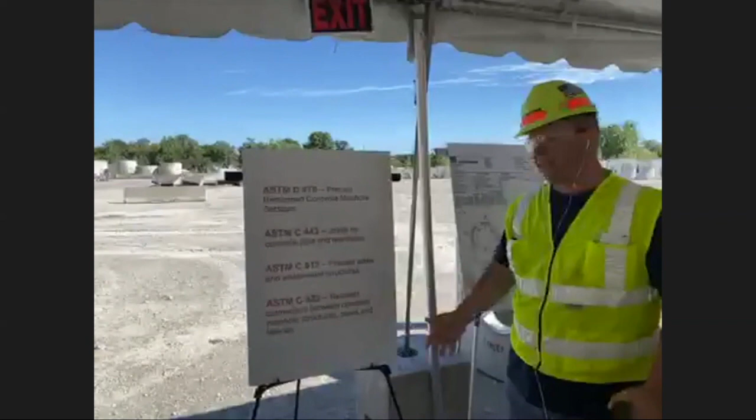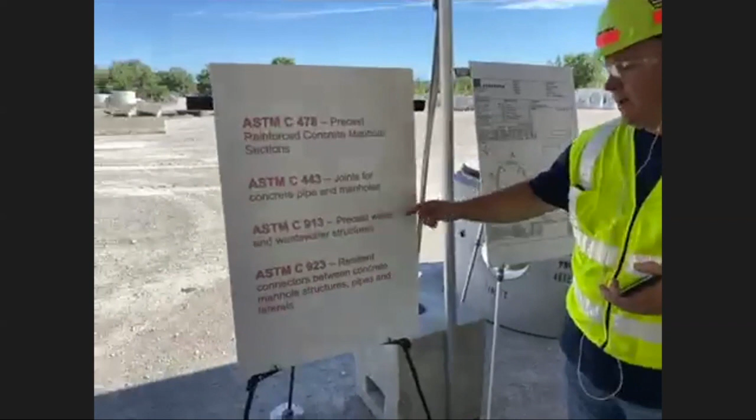In a precast factory, there's American Society for Testing and Materials standards, a bunch of different ones that we follow that govern everything we build. We made a quick list of the 4 biggest ones that we follow. The first one is C478, precast concrete manhole sections, which governs everything round that we make. 443 talks about the joints for concrete pipes and the joints for manhole sections, which we'll talk about later. 913 governs a lot of the rectangular stuff we build, which we'll talk about behind me. And finally, 923 talks about the connections between pipes and the structures they go into, resilient connectors.

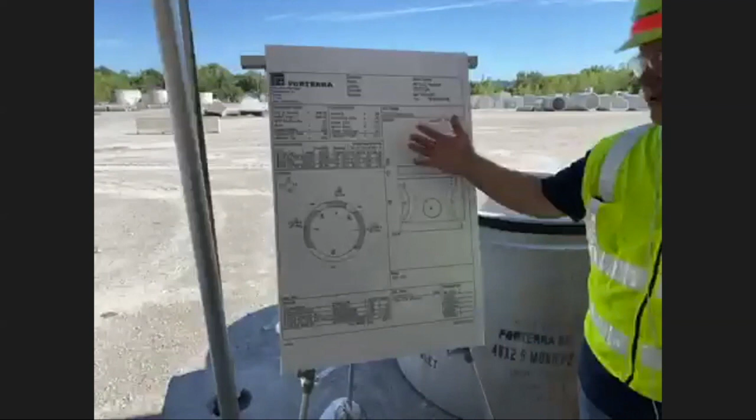The next thing I'm going to show you here is what we call a shop drawing. Precasters have engineering departments that develop drawings for everything, what we call MTO, made to order. Everything we build goes to a specific job, a specific customer, and has a specific purpose. This drawing here is an example of a round manhole. It's going to tell the plant that it's a 48-inch diameter manhole, how tall to build it, and also what openings to put in the structure for the pipes going in and out.

So if you look over here, this is an example of a finished product. The manufacturing plant is going to take this drawing and build this structure. For instance, this is a 48-inch round structure, and they're also going to put the different openings in it for the pipelines to go in and out into the storm sewer system.

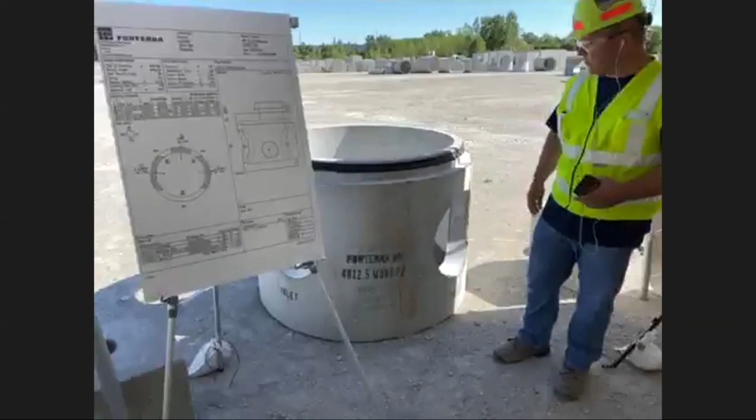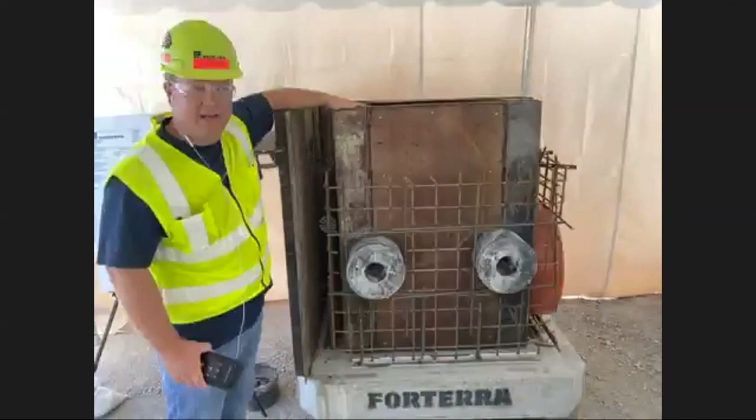Next, we have an example of an intake, this SW501, that's kind of in progress. The inside form is 2 foot by 3 foot, just like the drawing shows. We have an outside form that's 3 foot by 4 foot, which creates a 6-inch thick wall around the structure. You'll also see the reinforcing we use—everything we build has reinforcing in it. And then here are the blockouts, which form those holes you see on the drawings for the pipes to go in and out of the structure.

Next, we have almost like a mock-up of a finished product of this intake. So we put a grate on top. Many of you are familiar with these—you drive by them every day in the gutters of the street. What happens is the rainwater dumps down into the storm sewer system. Rainwater runoff we call storm sewer. It comes into here, inside our storm sewer structure, and from here the concrete pipe takes it to the storm sewer system.

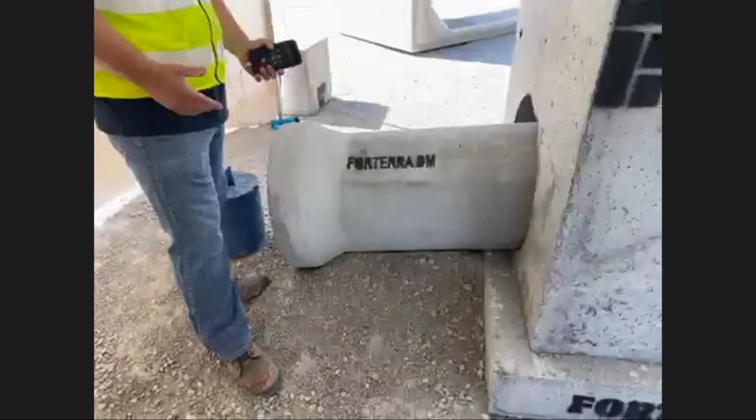We did a bit of a mock-up of what the contractor does after we ship the product to the job. They bed the concrete pipe in a rock bedding, then put the concrete pipe into the opening we formed in the structure. The final thing they do is a concrete collar to seal that connection, then continue to lay their concrete pipe out to carry the stormwater to its final destination.

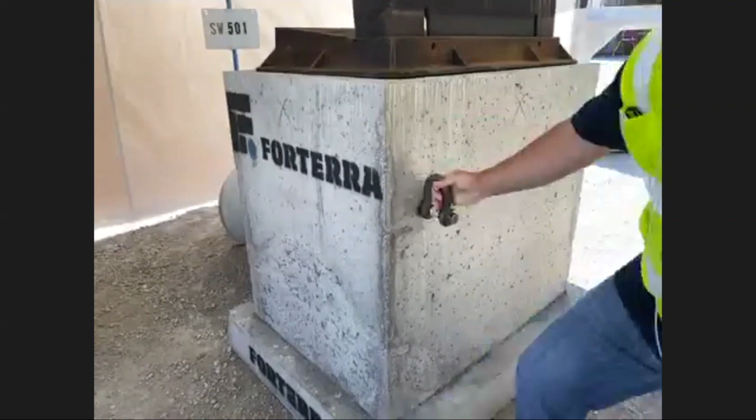One more thing I wanted to point out before we go across the tent is lifting. Everything we build in a precast factory has some method of lifting it—it's way too heavy for men to handle, so it has to be lifted by equipment. Here's a really good example, made by a company called A-Lock—this is a lifting key. In the factory, we cast in the receiving part of the key, and the contractors who install the products have these keys. They install the key, turn it to where it's in a safe lifting position, and it cannot come out, keeping them safe in the field.

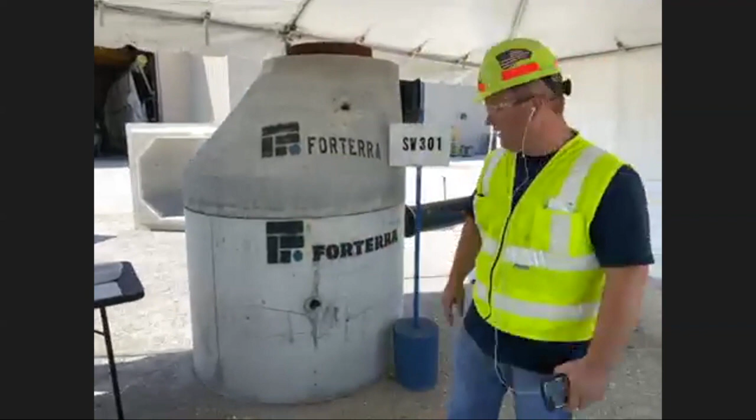So everything has a minimum of 2 lifting points in our factories. And if there's something that's not able to handle 2 lifting points, from the engineering side, we can figure out the center of gravity and create up to 4 lifting points if something's really heavy. Rectangular wise, I think the largest structure we've built here is 20 foot by 15 foot on the inside—just to give you a perspective of how important safe lifting is.

Next, I wanted to talk about sanitary sewer. Over there, I was talking about storm sewer, which is essentially rain runoff. Sanitary sewer is any type of sewer that needs to be treated before it goes back to where it came from—essentially, all this stuff is going to go to a wastewater treatment plant.

If you can see up top, it might be hard to see, but we put a manhole casting on top of this, a frame and grate. You drive over them every day, the round manhole castings out in the street. Below that is the sanitary sewer manhole. Here's an example of a cone section that tapers to a 24-inch diameter, and below that is the manhole section. These can be varying depths, from 3 feet to 50 feet deep, depending on how deep your sewer is.

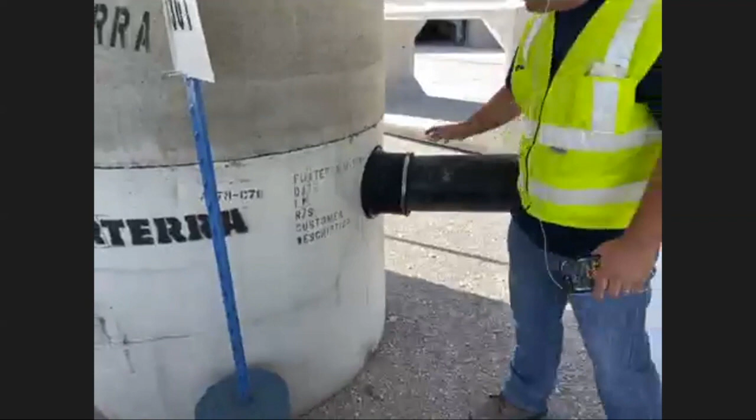Earlier I mentioned an ASTM standard that governed resilient connectors—it's ASTM C923. Here's an example of one. Your sanitary sewer is going to be carried in something like this, ductile iron sanitary pipe. But when it connects to the structure, it's going to have a booted connection like this. This is one of the 2 styles we use.

So this boot is expanded into the structure, but it's also going to be connected to the pipe with a hose clamp by the contractor. He's going to tighten that around the pipe to prevent any infiltration or exfiltration—so no groundwater can get into the manhole, and no sewer can get out of the manhole into the ground.

Finally, I wanted to talk about the joints and then the other resilient connector. Here's an example of a sanitary sewer base section. So the joints between the sections are also supposed to be tight.

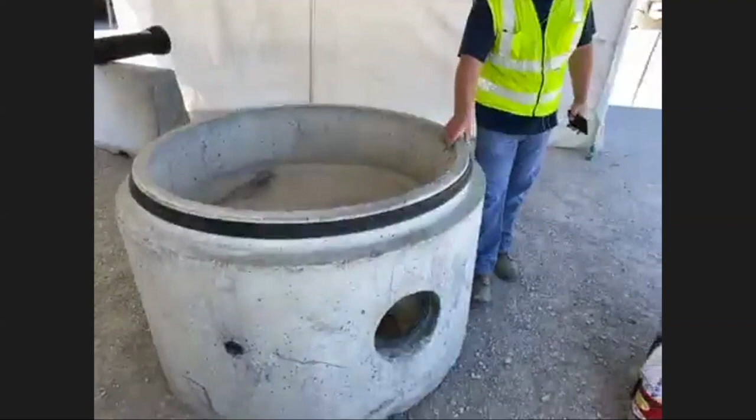They have what's called a rubber gasket on here, and this prevents any sanitary from getting out of the structure and also prevents any groundwater from infiltrating into the system. So when the contractor sets the next section on, this gasket is actually lubricated on the inside. It's going to roll over itself and then seal between the two sections.

And then finally down here, it might be hard to see because it's a small piece, but this is called an A-Lok, another product made by A-Lok companies. This is cast into the concrete. And when the contractor installs the sanitary pipe into this, the gasket actually squeezes the outside diameter of the pipe, again to prevent infiltration or exfiltration into the sanitary closed system.

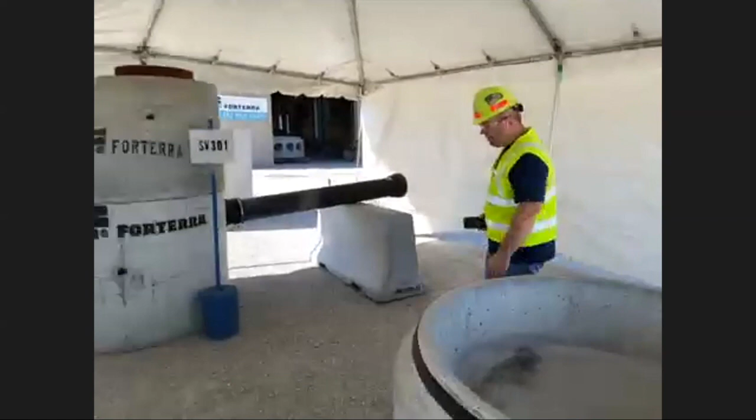Those beautiful concrete precast structures that Brandon touched on and showed you today are poured with two different types of concrete that we both pour here at the Des Moines plant. We have dry cast concrete and wet cast concrete. Dry cast concrete will be covered at another facility later in the tour, but today I want to touch a little bit on wet cast concrete.

Here at the Des Moines facility, our wet cast concrete is poured with self-consolidating concrete, or SCC. What you're seeing right here is the basic components of that SCC. So we have cement, type 1-2 cement that comes from Lafarge, produced out of Missouri, into our Des Moines terminal. We have fly ash, which we do a 30% replacement on, that comes from National Minerals Corporation, also into our Des Moines terminal.

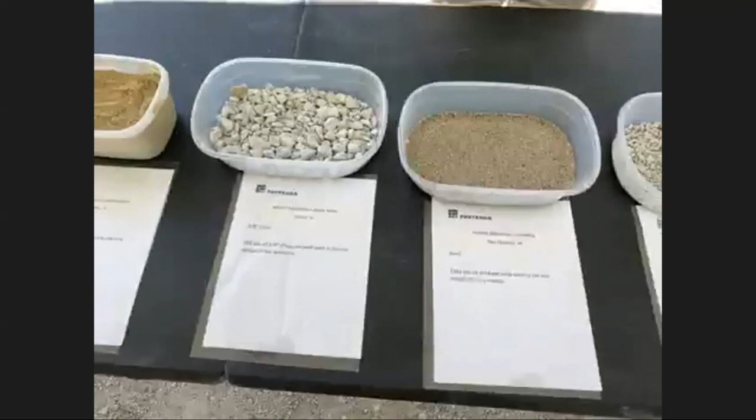And then we use a three aggregate system. So we have a 3/4 chip, a concrete sand, and a 3/8 chip. All three of those aggregates come locally. We are very lucky in Iowa to have great aggregate sources, and they're all within a 30-minute drive of us.

Along with those basic components of our SCC, we use additives such as high-range water reducers and viscosity modifiers to help suspend that aggregate into a very flowable spread mix. SCC is much like the concrete you see on driveways, roadways, sidewalks. When we put those additives in there, the water reducers and viscosity modifiers, we make that concrete very flowable into a 27-inch spread versus the slump you see out on job sites. So that concrete is working for us instead of our guys working at the concrete.

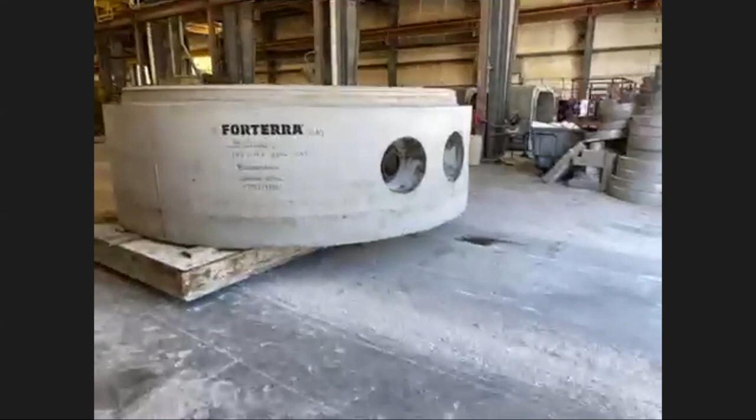As we walk into the production facility, we're going to look at some panel intakes first. As we pass by, we have a 144-inch manhole. If this doesn't work out for the contractor, we've got a nice swimming pool for the guys—a 4-foot wading pool. I think we want it to work out for them, though.

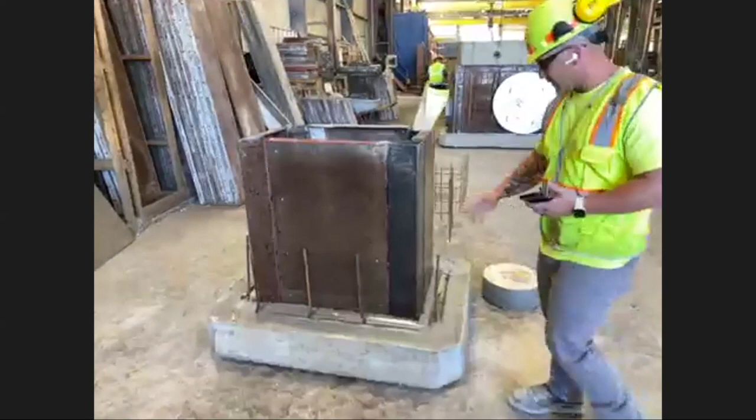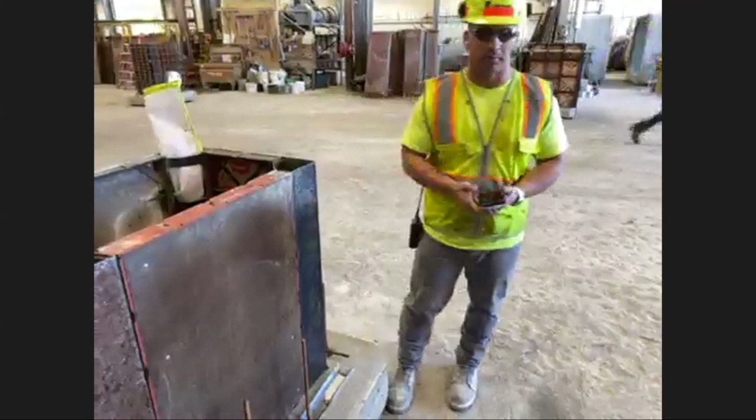The first one we come up on is sort of basic—this is a setup of a 3x2, or an SW 501, that Brandon pointed out. We have our floor section that we poured yesterday, and we've got our 3x2 set up. These forms are called Symons forms; in the construction industry they're also known as basement forms. They can essentially make just about any size we want, ranging anywhere from a 2x2 inside dimension all the way up to that 20-foot by 15-foot that Brandon talked about earlier. You can see the guys have their production drawing right here, just like we showed on the easel out there. This thing has its core up and we're ready to put steel on.

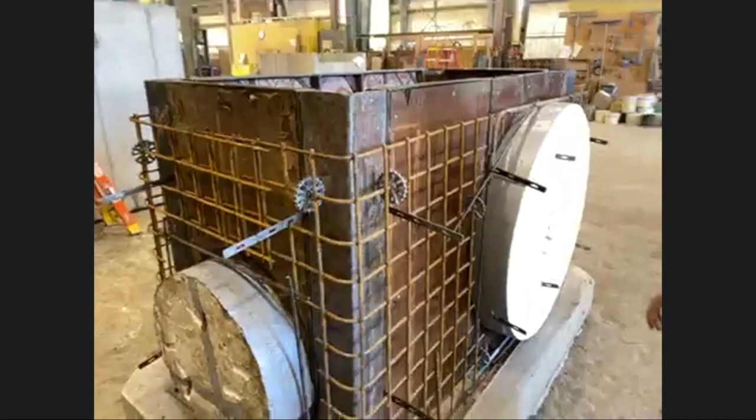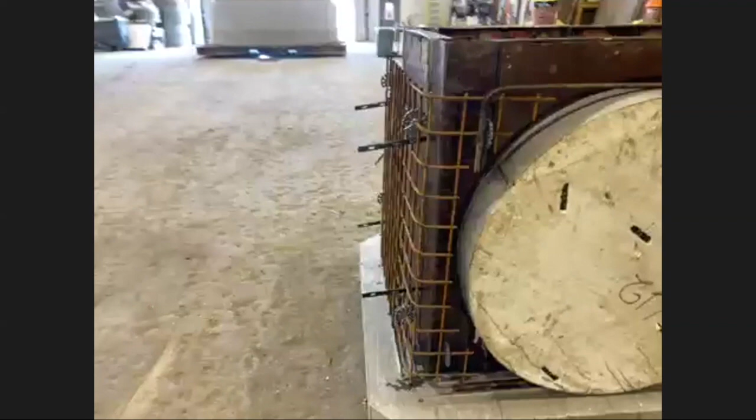As we move forward, just like the one we saw out there, we've got a piece that's ready to be QC'd. We've got our 42-inch hole for our RCP opening, with extra bar around that opening where we had to cut the steel out. We mainly use welded wire mesh at this facility, and we're lucky enough to do that in the state of Iowa. We have 4x4 mesh on this one, D10 and a half by D10 and a half, and we also have that equivalency due to our SUDAS standards. You can see we have spacers on there, and our 6-inch wall ties to make that 6-inch space as we put our jackets around. Next, this would go to our QC or management to sign off, go through our ACPA certified checkoff process, and then give the guys the go ahead to throw that jacket on. So that was a 6x3 structure we just saw.

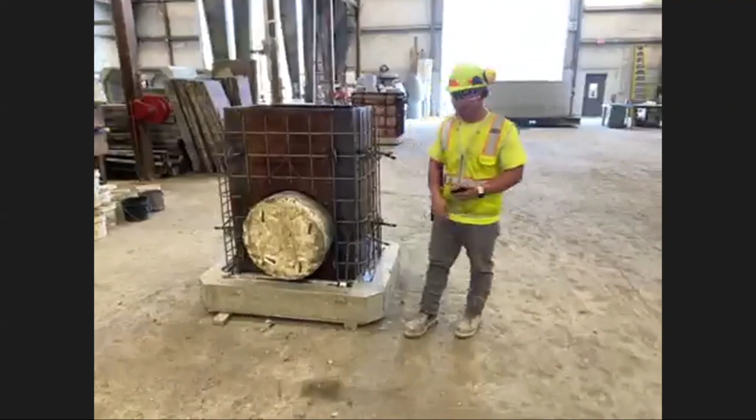We're going to move over to another 3x2—just like the core setup we saw, we'll see the same thing here. This one required a little bit different steel, an area 20 instead of an area 31, so you can see we have 6x6 spacing here, with D10 by D10 wire. We have that opening for a 15-inch RCP going there. Again, we have our spacers, and we have our 18-inch opening—I believe that's for a 12-inch RCP on that one.

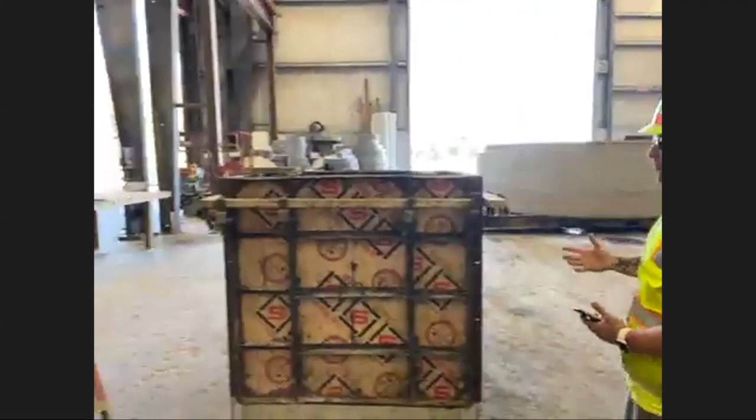That one is ready to be quality control checked and signed off on, so they can put those jackets on. The last one you'll see here is a finished, ready-to-pour product. They have their walers on the outside, which helps keep that wall straight. Sometimes if we have a large block out, we'll nail that to the base.

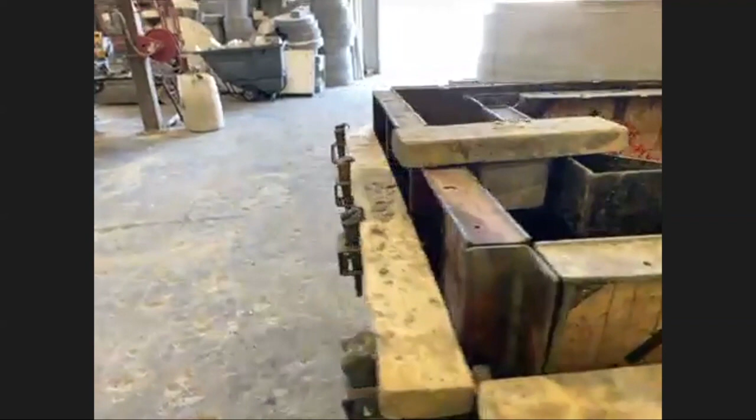Up top, you can see that this panel is not going to be poured all the way to the top of the form, so we have a drag board set up to be able to pour that height. This particular piece has been signed off on by QC, and the signed-off sheet is in the folder showing it's ready to pour. Then our pour team can come through and do their job.

I think that's it for my part of the tour. I'll throw it back over to Brent.

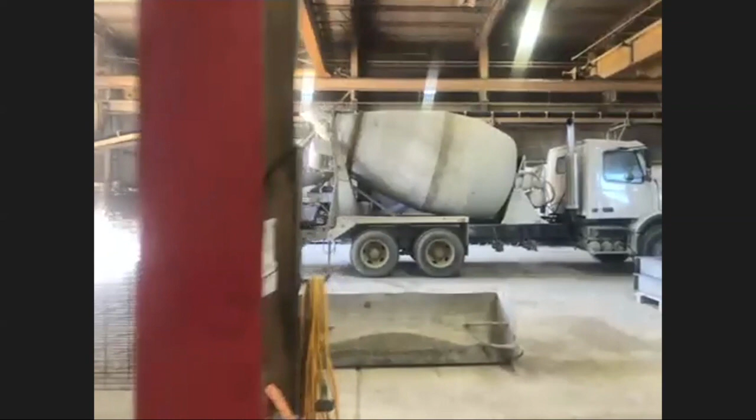We're going to move right into our production line here, and I'll have John Christensen take over and describe what you're seeing on the video feed. Morning. This is our mixer truck, this is how we pour. We have an in-house batch plant, and we pour with that along with that 2-yard bucket, which is a remote control bucket provided by New Hampton Metal Fab out of Iowa. It's run there by our overhead cranes. Everything we do in this plant is with overhead cranes.

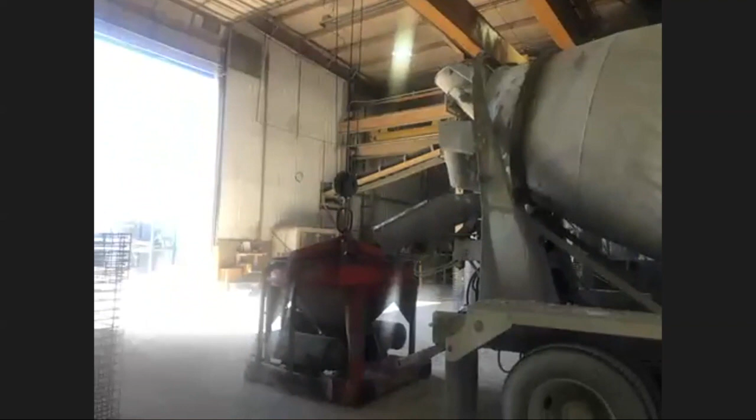The cage to your left is a standard 10x6 Class 2 cage. You're looking at a piece of duct tape there with all the dimensions written on it by QC to make sure it meets all specifications. Also on this cage, you're going to see the spacers that hold the spacing 5 inches on the interior with bolsters, and on the exterior we've got either the round wheels, 1 3/4, or the poly snaps provided by Strike Tool.

Question, John, or maybe for Yes, Jake or Matthew: how do we know how much steel to put into our cages? You want to take that, Jake? You might be on mute, Jake.

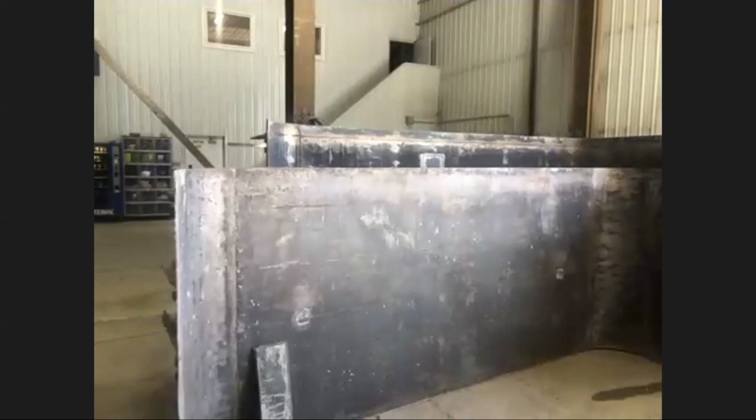We know how much steel to put in our cages based on the design. MnDOT has standard designs for that, so we follow those standard specifications. That's how we know. Or if it's a special design, our in-house engineers will design that.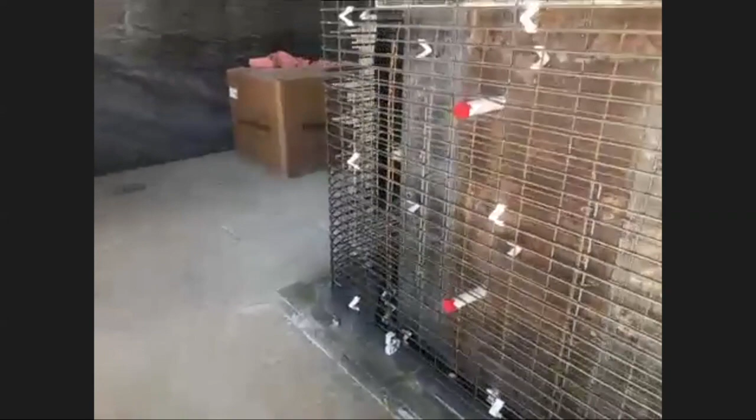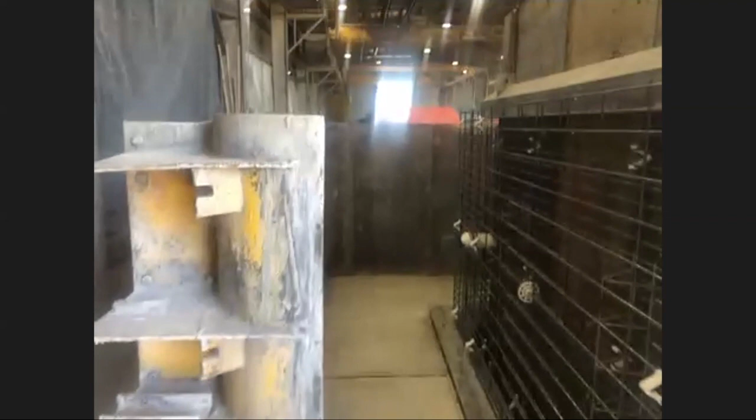Now as you're walking across, you're going to see another 10x6 core set up here. This is the point where QC is going to double check it again. Even after that, they're going to check it again to make sure the tie pin holes are in it, make sure there's enough poly snaps on it, make sure all the spacers are correct, make sure the wall thicknesses are correct. That is one of the PVC for the tie pins. As we pan around to the back, we do use PVC for our lay holes here. That helps assist in laying it, but also as we tip it off the form here.

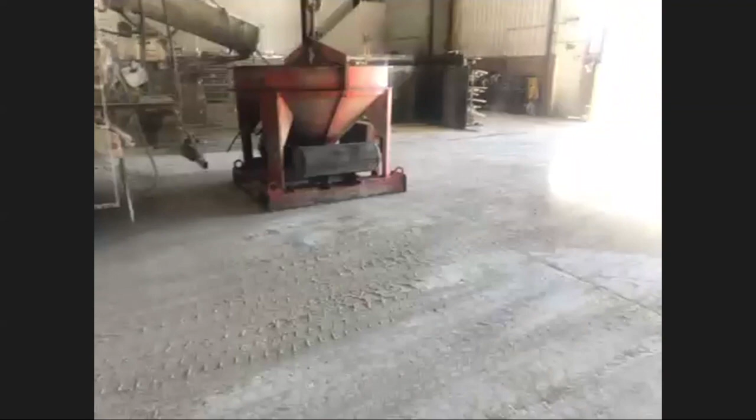As we walk around, this piece of pipe right here will weigh in excess of 20,000 pounds. This is just a jacket waiting to be sat on the form. As soon as it passes QC, they'll let them know to put it around there and pour it.

We're going to walk outside the plant here over to our quality control area, again using the man doors for safety purposes. Entering door 17.

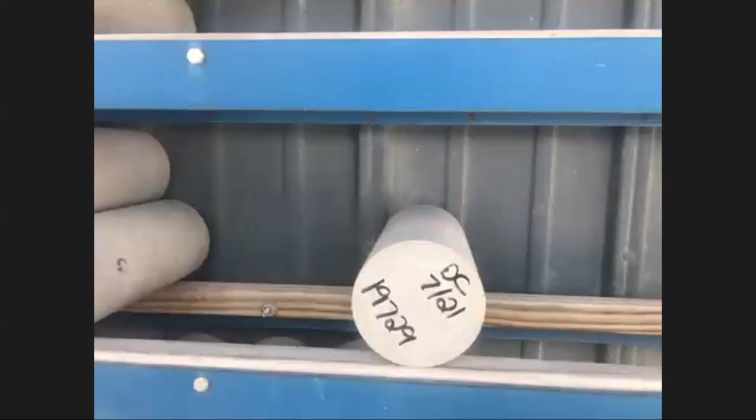I'll ask Matthew to jump in here regarding quality and how we assure the strength of our concrete. So the first thing you're going to see as we walk up here is what we call a cylinder rack. Basically what those cylinders represent is a sample of the batch that is used to create the products. Usually a batch represents about 25 yards of concrete. That one you're looking at there is a dry cast cylinder formed on 7/21 out of batch number 19729.

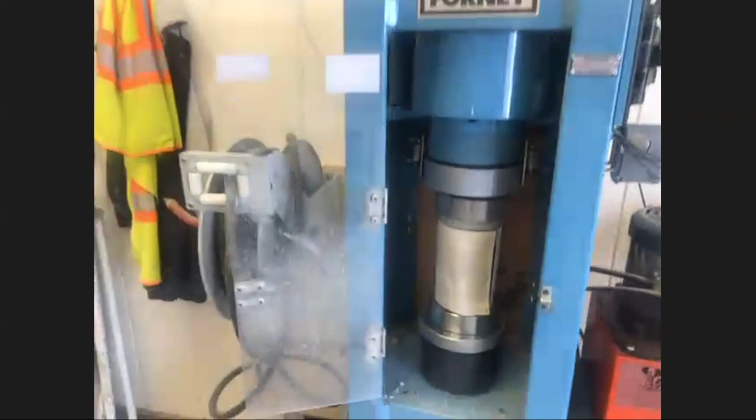Basically what these cylinders do, depending on the class of the structure that is poured, is represent the strength of those products through day 1 through day 28. So for example, tomorrow they're going to break cylinders that were cast today. They're going to put them in the machine you're looking at right in front of you, the big blue machine there, and that is going to create a load on that concrete cylinder until it breaks. Once that's broken, it's going to record the PSI that was used to break that cylinder. Then, depending on the class of that concrete, it's going to verify that it can withstand the amount of strength required to be used in the field.

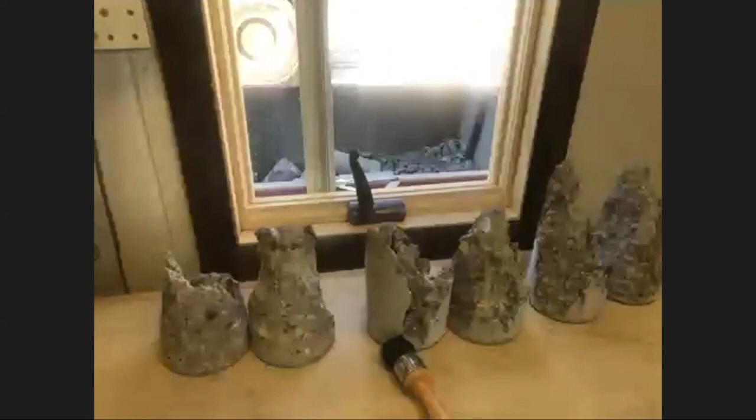So we'll break them on day 1, and the last one we'll break is on day 28, and intermittently throughout there, to verify that the concrete has the recommended strength to go out into the field. No concrete structure will be sent out until the strength has been met.

Matthew, could you briefly explain how we interact with our DOT here? Absolutely. So we have a Minnesota DOT inspector on site at all of our plants 24/7 when the plant is in operation. The reason for that is a lot of our DOT jobs are inspected by our quality team, and they're also inspected by the Minnesota DOT inspector to ensure that the structures made for those jobs are adequate to perform. Then the Minnesota DOT inspector will actually put their stamp of approval on the concrete structures that go out in the field.

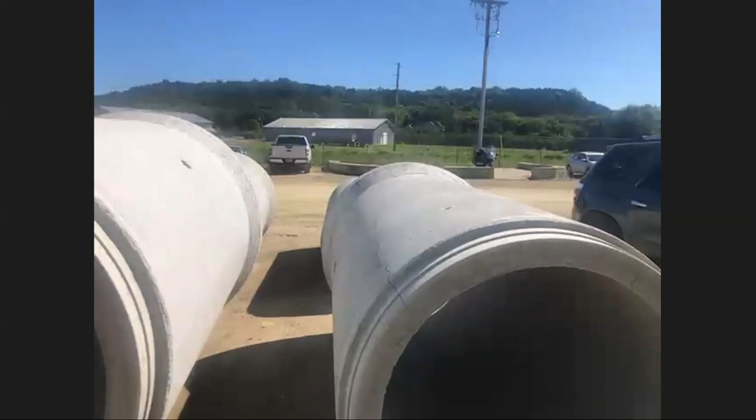Great, thank you. John, you want to describe what's going on here with these pieces? Well, these pieces here have been put through our 3-edge bearing tester. We put an ultimate D-load on these, and after that happens, these pipe are put out here to be cored, to verify the core strength and the steel placement. So that's what these pipe are here. These are waiting to be cored.

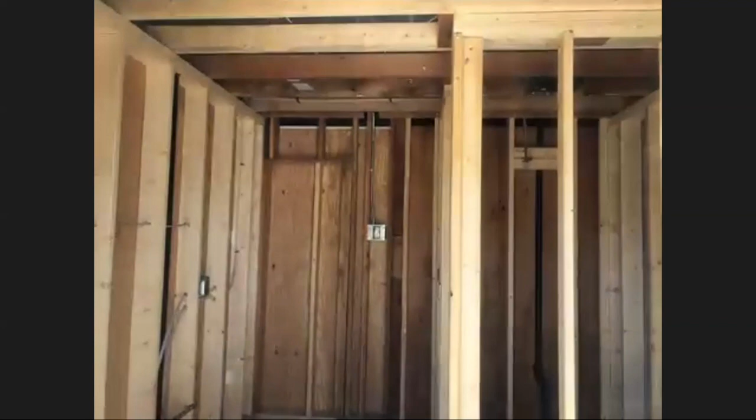Thank you. Let's highlight something that's a little bit different about our plant here in Cannon Falls. You want to describe what I'm walking into right now, John? This building is currently under construction. This is a project Hancock is really excited about, because with COVID-19 and our truckers - we recognize they're one of our biggest assets - and with Morel Transfer out of Elk River and Lefebvre Transportation out of Elk River, and the truck stops essentially, a lot of them shutting down to the truckers, they have no place to go. And they're typically on the road about 5-6 days a week.

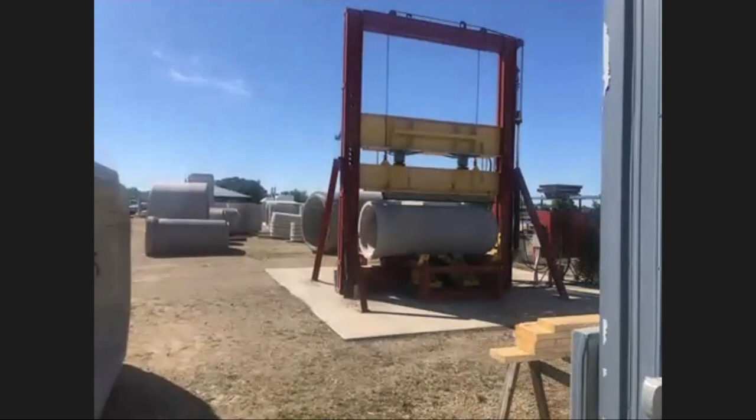So this is our shower house. It's got a nice big shower in it, a 4x6 shower, and a laundry room. This is going to be a place for them to go. There'll be an awning out front, a grill, a slab, and whatnot. So it's kind of a home away from home for them where they can go. That's great for us too.

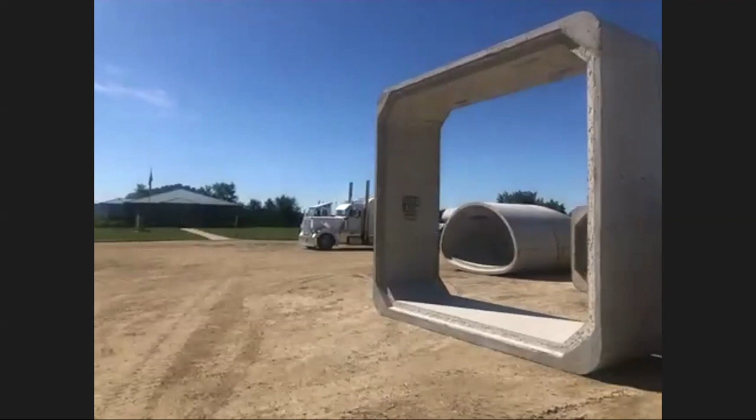The wet cast is your traditional concrete, what you pour your sidewalks and stuff like that out of. Dry cast is a lot drier. It has less of a water to cement ratio, can get down into that 0.23 and whatnot. So it's a huge difference, one's dry, one's wet. In the next part of the tour with Riley from Forterra, he's going to have an example of what dry cast looks like and what that entails.

Another good question while you're on wet cast and dry cast that helps follow up is, how do you cure the concrete and how long does it take, wet versus dry? Curing time is relatively about the same. Dry cast, typically about 18 hours, we meet our design strength. Those are typically right after they're poured, they're all covered up. Same as our wet cast, they're covered up, a 3-hour wait time, and then we go ahead and apply steam at a certain rate to them.

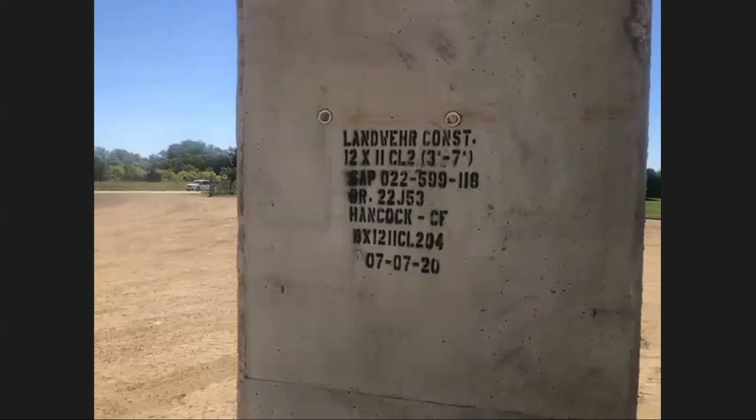And what is that compressive strength of concrete? Depending on, a standard dry cast pipe requires 4,000 PSI, and you can get like class 5 with 6,000 PSI. Your box culverts here have a standard of 5,000 PSI, but when you get up into some of your higher classes and higher fills, they will be 6,000 PSI.

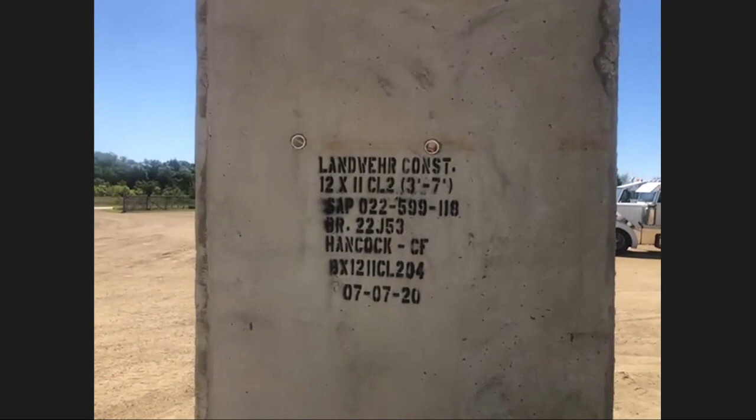Great questions, thank you. So John, what am I standing in right now? Here you're standing in a 12 by 11 box culvert produced for Landwehr Construction. It's not the biggest box culvert that Hancock's makes. The biggest one produced at our Hancock facility was a 16 by 12 double cell back in 2016, but we do make them up to 24-foot span and 17-foot rise.

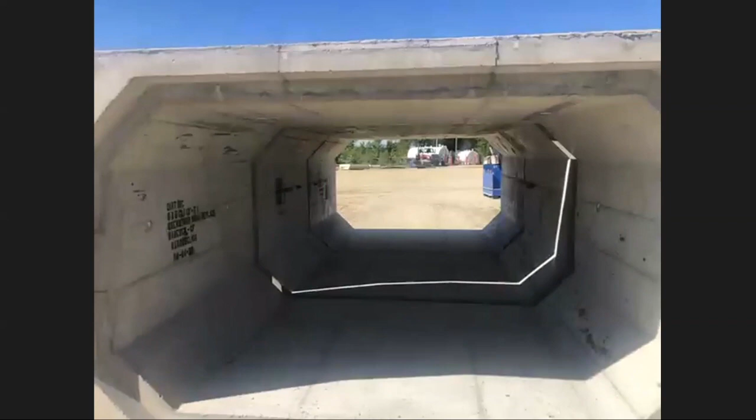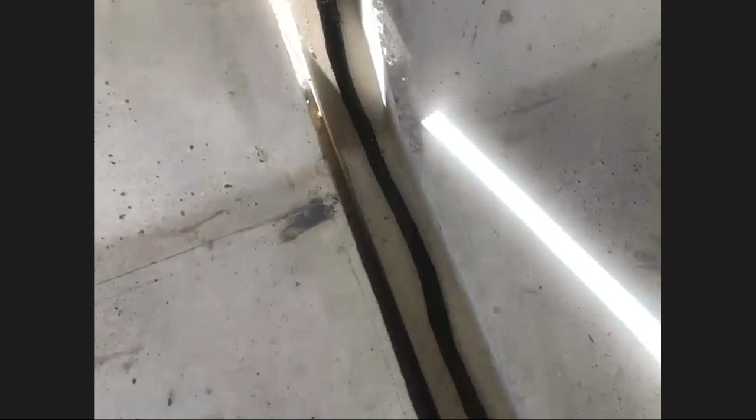This is a 9 by 5 that we just put together here to kind of illustrate how this is out in the field, what the contractor is looking at as far as the mastic, where the mastic is placed. As you see here, the mastic is placed in the center of the joint, and it goes into the haunch, dead center of the joint, into the haunch. And this is on the flow line, but MnDOT requires mastic all the way around on their joint. So as we go to the outside, we'll see how we place that also.

And then of course, the next one is the tie rods in there, and then the joint actually together. So you can either have your tie rods, depends on what the municipality wants, whether it's inside out or outside in.

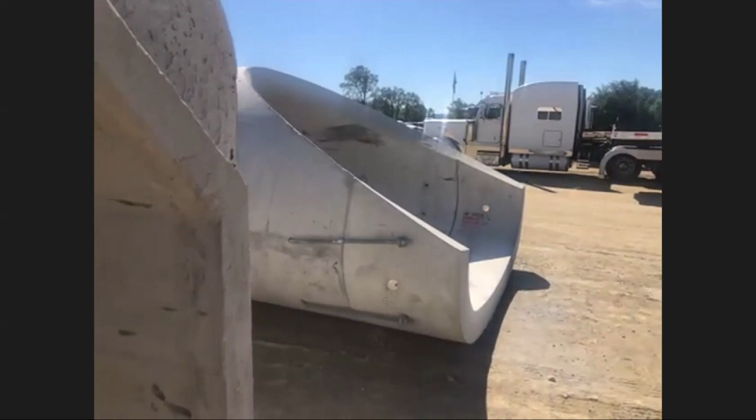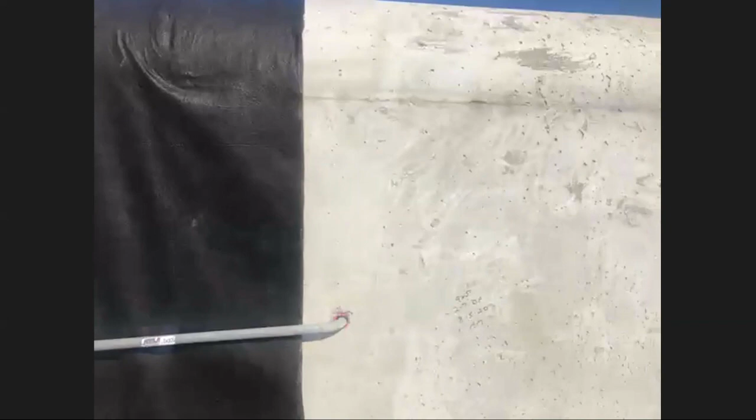We had a quick question based off a vocabulary word. What is mastic? Mastic is the joint sealant. It's a butyl mastic. This particular one is 1 inch by 1 inch that is put into the joint. It's a sealer, you'll see it, we call it mastic. This particular one is the filter cloth that goes over the top of the product. The contractor would apply an adhesive and stick this right there prior to backfilling to ensure that that filter cloth stays there. That ensures that there's no infiltration of dirt and sediment.

So here's the other part of the mastic, John. Obviously it got a little hot, and it looks like it dripped off. Yes, it fell off. That would come all the way down. That's that butyl mastic, inch by inch, that is set in the joint.

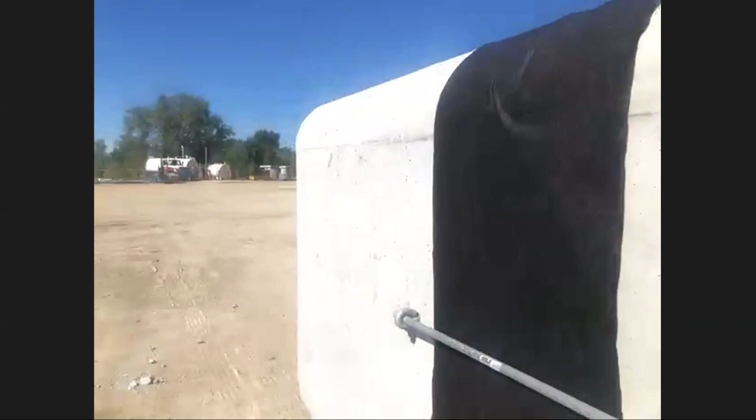I think our time's coming to an end here, but let's briefly show our 115-inch arch pipe here. This is standard arch pipe that we produce. We produce all the way up to 169 inch. This is 115, shows you a number 2, a number 1, and a 6-foot barrel section.

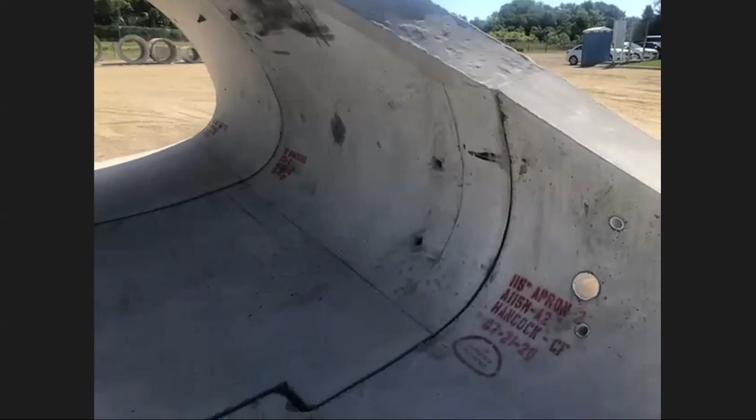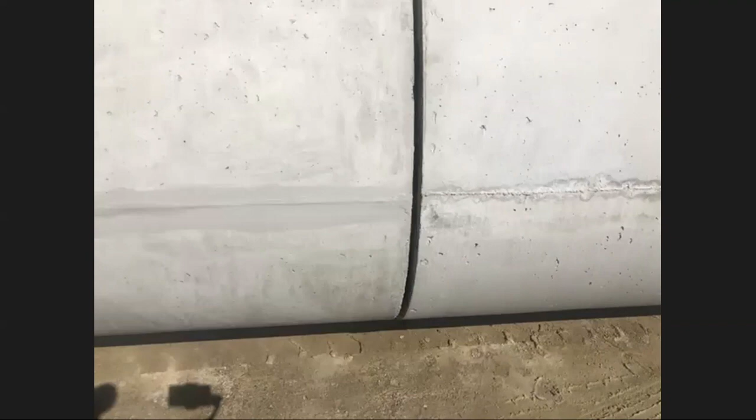Hey Jim, I have one more question for you before you jump over. What are, just with regards to the outside, is there any finishing that's done to the surface, either to make it look a little bit neater, smoother, or anything like that? Or does it just kind of go in as is? No. The surfaces are mudded. Like this one here has not been prepared yet. They get mudded and all joints are sealed up. And then of course, anything bigger than, let's call it the size of a dime, bug holes are filled.

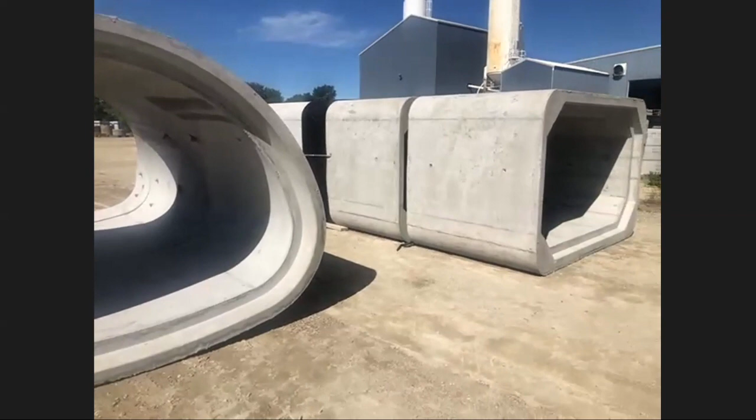This one we just pulled right off production, and brought it over here and marked it. We do have a continuous patching crew that will work, probably 1 or 2 of them at each of our plants. Another great question that came in is how that goes to the finishing look, how is concrete consolidated in our plants?

In the wet cast, it's consolidated with high frequency vibrators that hang on the form, that's how those are consolidated. Over on dry cast, they're internal low frequency vibrators that force it down.

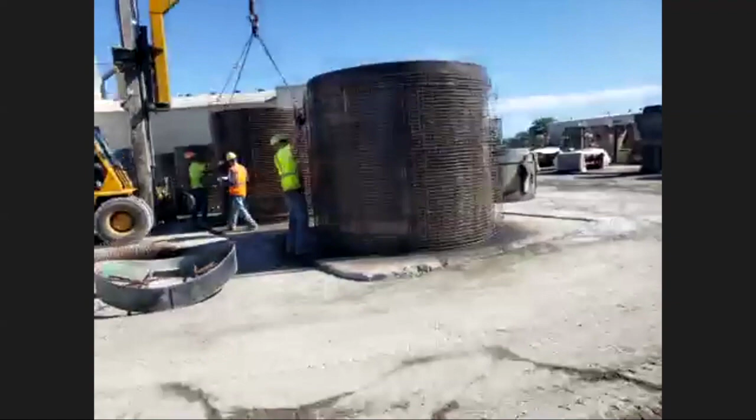So as Brian said, we do make a lot in this facility. We make pipe, bridges. Hey guys, how's it going? We make box culverts and a ton of specialty stuff, but what we're going to be looking at today is just pipe. Oh, hey, this is why you use doors and not the overhead, right? Hey, Jake. Hey. All right, so we're going to be moving through. We make a lot of very heavy stuff, so you'll see a lot of really big equipment here. We make all of our large diameter structures here, so you can see our manhole setup right in front of me here. I am making my way over to the dry cast pipe building.

That is a big building that we see in front of us here. Up to the left, that is our batch plant, where we mix all of our concrete. That's really where the process starts. We've got silos with all of our aggregates, sand, and cement, and that's what we mix into our pipe right away.

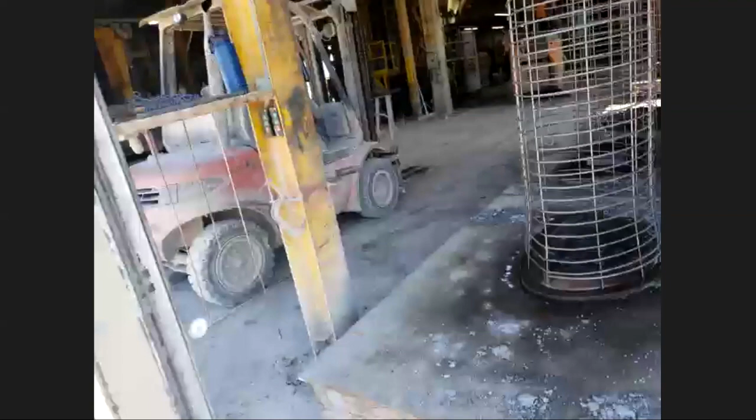So the first step of the process, the first thing I really want to show you guys, is when it comes to pipe production, it really starts with a cage. That's what we've got in front of us here. This is an arch cage, a 29 span arch. A lot of what we do here in Elk River is with 2 cages, but this happens to be a single cage product.

So there's a few things that we're concerned about when it comes to our cage. Number one, the diameter. You guys saw over at Hancock, they had measurements written on their cage, and those are very important. Those are measured with micrometers, just to make sure that the diameter of the wire we're using is sufficient and as per design.

We also want to keep an eye on the spacing between the wires. Obviously, if wires are spaced closer together, that gives you higher strength. And the last thing we're worried about when it comes to cages is the position of that cage within the wall. We want to make sure that cage, for obvious reasons, is not too close to the surface of the pipe, where the steel could potentially corrode over time.

We also want to make sure it's not too far into the wall where we're losing strength. Because if you know anything about reinforced concrete design, it's that our product gains most of its strength from the steel itself. Concrete's very strong in compression, but it's pretty weak in tension. So we need the steel to be in those areas of our product that experience the highest tension. If it's not in the proper location, we can lose a lot of strength because of that.

So to keep it in the proper place, we have these spacers. These are metal spacers. This one is making sure that the cage isn't too close to the outside core, and it's not too far away. And this spacer over here is the inner spacer, keeping the cage away from the inside core of what will be the finished product.

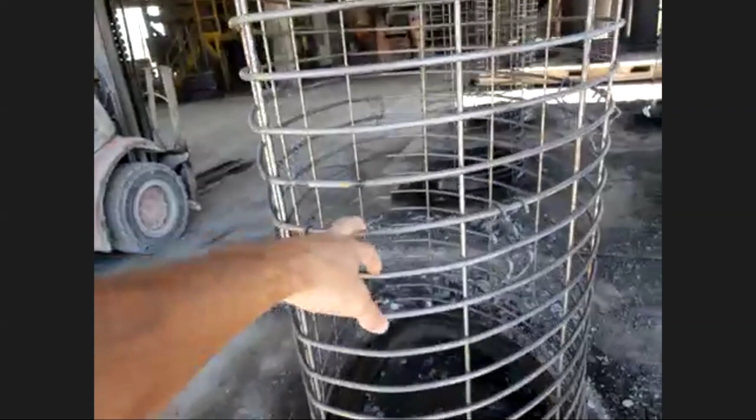So that's where things start. Now we're going to get to see some pipe being made. It looks like they're kind of getting set up here. I'm going to go around, so follow me this way.

I'm going to note here, this is what we use to make our tongue on the top of the pipe. So this is a joint ring. The inside surface is what forms the joint. This is what we'll see in a little bit. This gets lowered over the top of the finished product to form the joint.

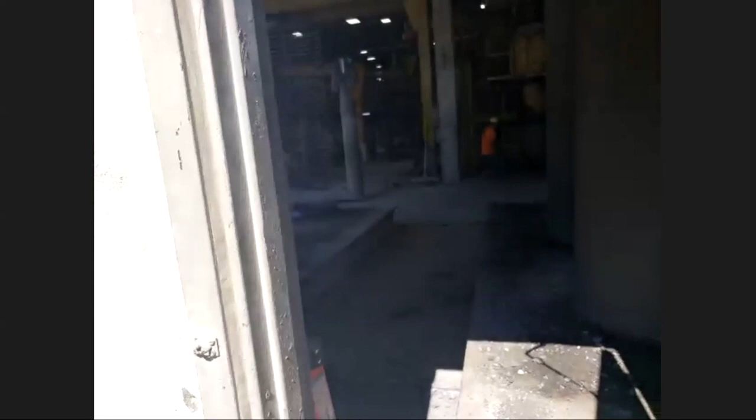So I'm going to come, Riley, we have a quick question for you that I think you'd be able to answer well. I hope so. Being that you are in Minnesota, a place with some extreme seasons, how does your production process vary with the different seasons? Do they change? Are they relatively normal, or do you just live under a big heat bubble in the winter?

You know, I'd like to say we live under a big heat bubble in the winter. That sounds really pleasant. In the winter, unfortunately, a lot of our facilities have to lay people off. Most of our workers here plan on that as part of their routine for the year.

We've basically got 9 months of production, since our construction season and plant production season are shortened by winter. So most of what we do gets shut down. However, a lot of our indoor operations, if need be, can continue. The building we're seeing here could potentially be functional, but the hard thing is we have to heat up our aggregates, and everything imported into our concrete mixes requires extra work. So it's a little more costly to run in the winter. We can do it indoors, but we don't always do that here in the way up north.

Thanks. So no, great question.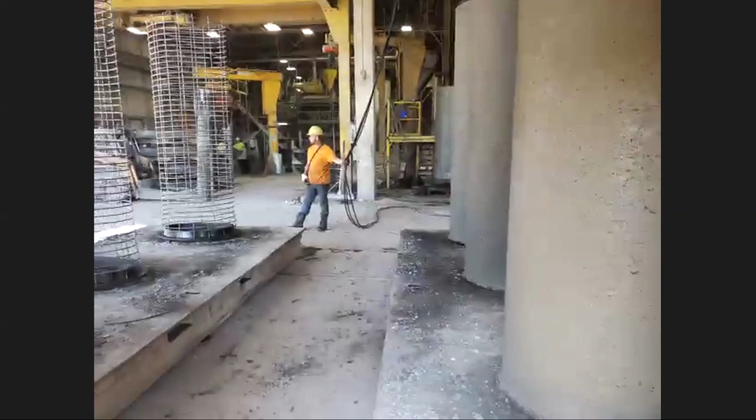I'm just going to peek at things through the window here, since as soon as I go in, I lose signal and you guys will lose quality. Actually, I'm not getting the best view here, so I'm going to move around to get a picture through the door, since we'll have a much better angle. Let me try to get out of the light. Can you guys tell if my video is coming through okay? I know it's kind of bright. It's okay, Riley, if you take one step farther forward that might help, but otherwise we can see it relatively well. Okay, I'm going to be in the middle of things, hopefully my video doesn't slow down here.

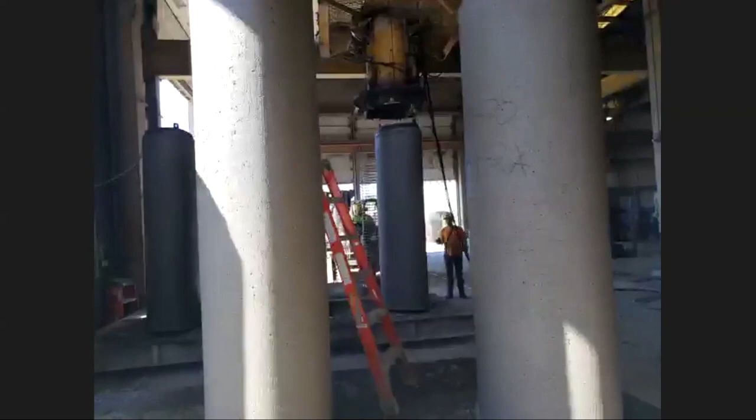While we're watching this process, there was a great question about what's the biggest reason to use dry casting versus wet cast. From a production process, it's just far more efficient. We can crank out quite a bit of pipe in a much more timely manner. It's a very precise process, so what you see here is very consistent. These pipes are identical, there's no way to tell them apart. So it's a highly innovative process for high efficiency, and from a manufacturing standpoint this helps cut our costs down so we can supply a quality product at the best price we can.

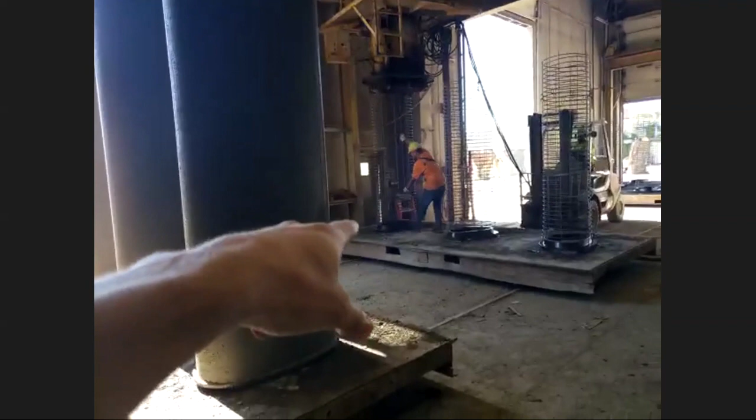You can see that piece of yellow equipment standing up there being suspended by the cranes, that's the jacket. What they're doing right now is lining up a cage so the jacket can receive that cage. It'll lower over the cage and pick up the joint ring beneath the cage, and that whole assembly is going to be lifted up. Let's watch that, and we get to see how they form a pipe.

That operator right there is controlling the crane, so he's got control over that jacket. He's ensuring that everything is aligned. It's going to get a little loud in here now. Hope I don't lose you guys. So as you can see, he just picked up that cage.

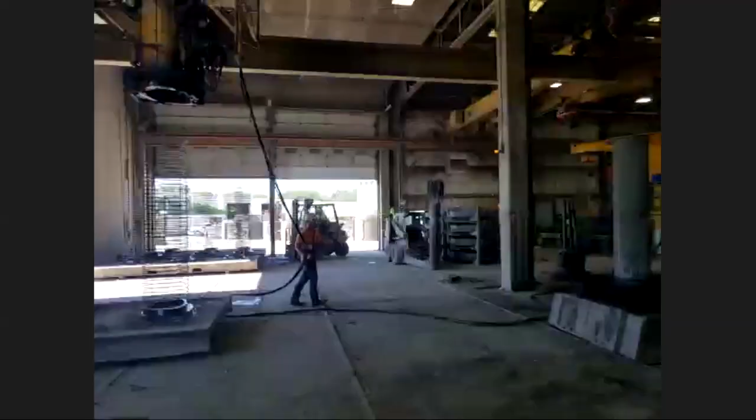Hey Riley, I think we've lost a little bit of your audio, you might need to step back out of there a little bit. We see the video, but we're not hearing you quite as well.

I think to interpret what Riley was saying is that they were lifting the jacket overhead, and now they're placing it on that inner core that will form the inside of the pipe. So that jacket's now going on over that inner core. They moved the trays here so I got a better view from the door, hopefully you guys can hear me okay. So they just lowered the cage, detached it from the crane, and now the operator is checking to make sure that cage is centered, pulling everything down to get ready to work.

So we're still having a hard time hearing you, Riley. I'm not quite sure why at this point. I don't know if you need to bring it a little closer to you, or maybe you lost connection with your headset, but you're still sounding pretty distant.

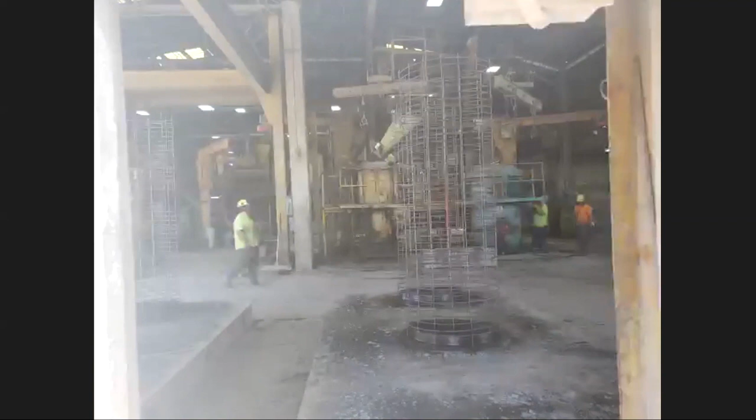While Riley's working on his sound, if you see that little yellow sloped piece there, they're pouring the concrete right now into that form. I want you to take note of how quickly this entire process happens, which is what Riley was talking about, the efficiency of dry cast.

Well, I apologize if you guys can't hear me. Tim, thank you for stepping in and describing some of that for us.

We hear you distantly, Riley. Go ahead and keep talking, and while it's quiet, we'll be able to make out what you're saying. Sure, yeah. I talk to myself enough as it is, so hopefully you guys can hear me.

So right now that form is getting filled up. What they do as that form is filled with concrete is turn on vibrators, and that helps consolidate the concrete into place. That's a dry cast mix. We'll get a look at that in a little bit, as to what the consistency of that is, but it's a very dry mix that requires a lot of energy to consolidate into place, to make sure we get all the voids out, that we got a really dense mix at the end of the day.

Generally speaking, our concrete mixes are 4 KSI. For some of our higher class products, we go up to a 5 or sometimes 6 KSI mix. The nice thing about that is we get those design strengths in 18 hours, and I think that was mentioned previously. But our concrete, just like any other concrete, doesn't stop gaining strength. So our 28-day strengths are oftentimes 50% higher than that. We can get 28-day strengths on a 4,000 PSI mix of 6,000 PSI, and that's above and beyond what any designer intends. So there's really a lot of robustness built into our product that we take a lot of pride in.

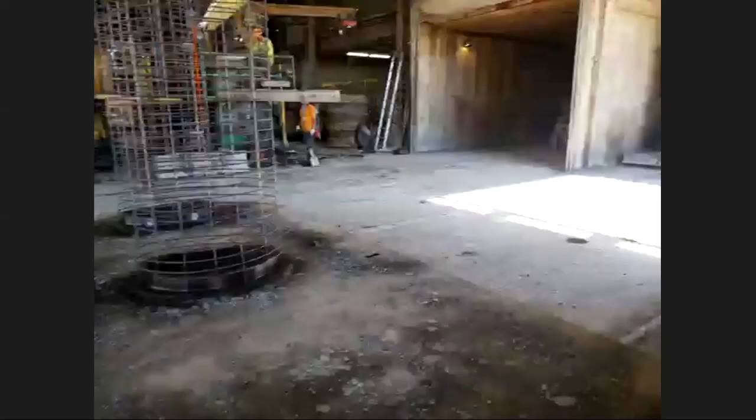In a few seconds here, after he presses that joint ring down, that entire jacket will get lifted up with the pipe in it, and it would get placed on one of these trays, which are our curing trays. At the end of the day, we push these trays into a kiln, where our concrete is steam cured overnight, and we tip it out in the morning for stenciling and detailing. That's where the end product comes out on the back end of the building.

I'm just going to close out by going over a few displays we've got over here. This is a couple pieces of 48-inch pipe with two different styles of joints.

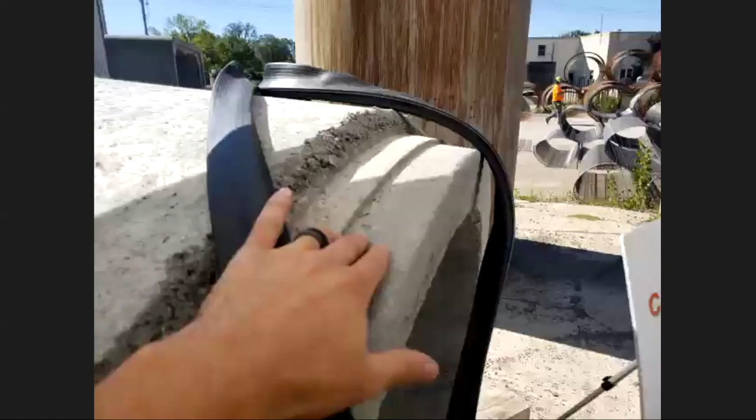We've got an O-ring joint right here. This has a little groove to receive the O-ring rubber gasket. And this is a profile style gasket joint. It's basically just a single step, and that's where the gasket sits on. The gasket rolls over itself. It's a very construction efficient joint where contractors don't have to spend much time greasing things up. They'll be able to set the joint and continue on unhindered.

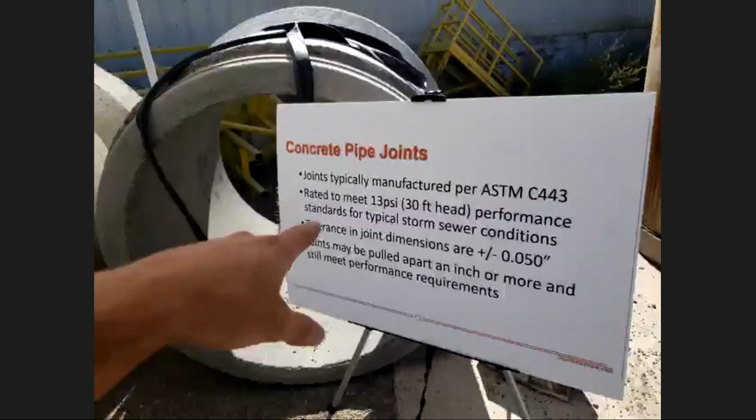Either way, those are both gasketed style joints, meaning they meet the requirements of ASTM C443, and that's a rated joint for 13 psi or 30 feet of head, which is more than enough for storm sewer conditions. It's actually a very, very high performance joint, something we take a lot of pride in.

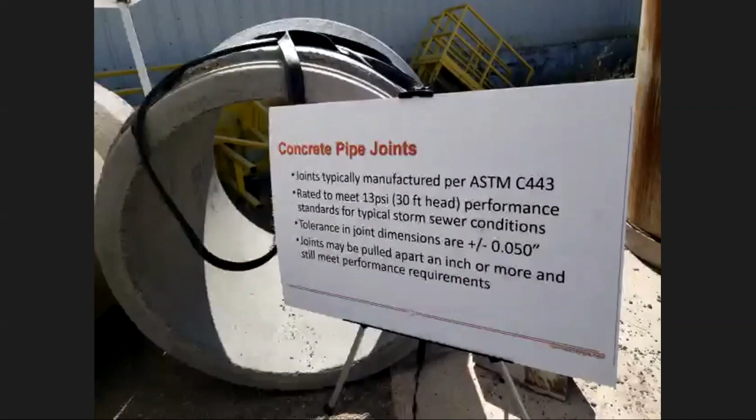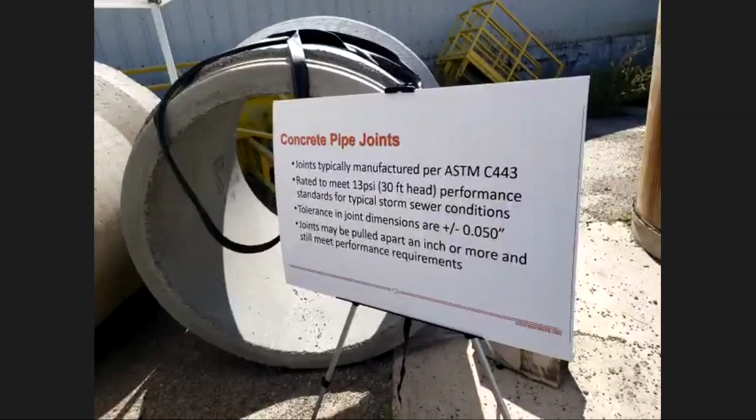To get that kind of performance consistently, we keep our joint dimensions, our tolerance on those joint dimensions, plus or minus 50 thousandths of an inch. That's incredible when you think of how robust these joints are, given that we're using concrete to make them. Some of these have spans of up to 10 feet, and we're keeping that really tight tolerance, less than a 16th of an inch on any given dimension within the joint, which is incredible. So we take a lot of pride in our joints, and we hope you do too.

Just a couple things to finish out. This is our dry cast concrete mix. It's a zero slump mix. The really amazing thing is we can have freestanding pipe just after we consolidate it, after everything gets shaken into place.

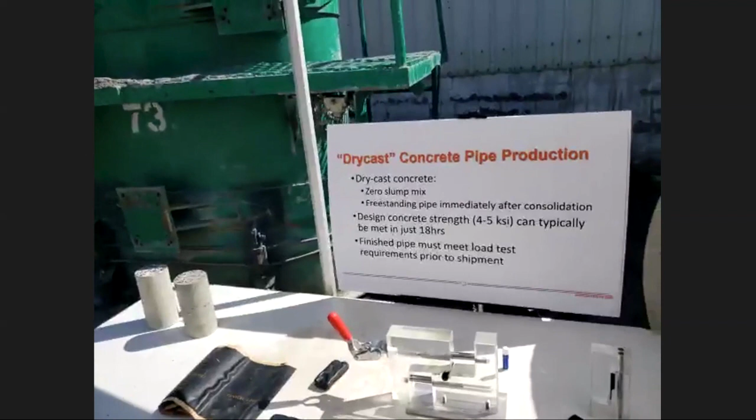As Jim pointed out to us earlier, all of our pipe, even though we've got our QC to keep our cages right where they need to be, making sure we've got the right wire sizes.

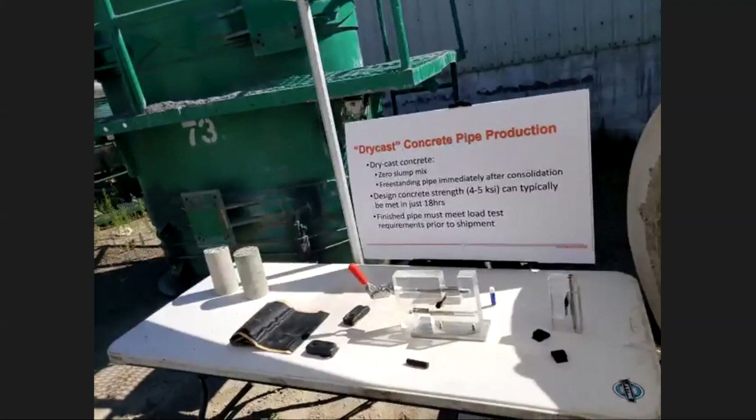Riley, I think you just went on mute. If you can unmute your phone. Riley, I think you unintentionally muted yourself there. Oh, there you are back, Riley.

Here's a dry cast mix. This is what we reported earlier. As you can see, a very, very dry type, kind of the consistency of maybe beach sand with a certain amount of wetness. But the fact that we can get this to stand 8 feet on end without tipping over is a pretty cool science experiment or accomplishment of science, which I just think is really, really neat.